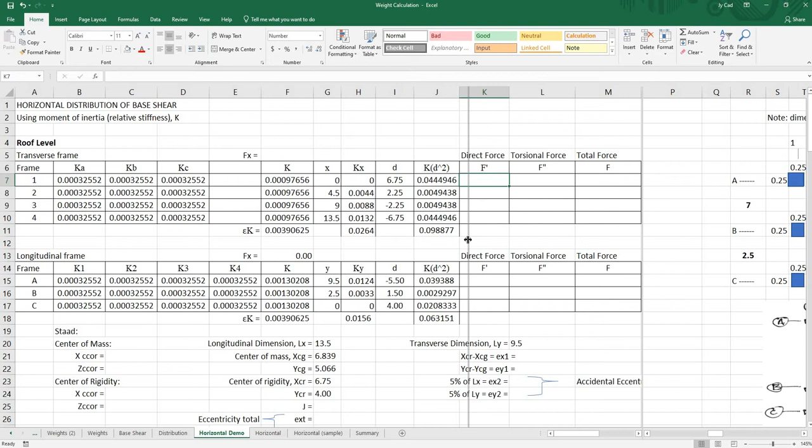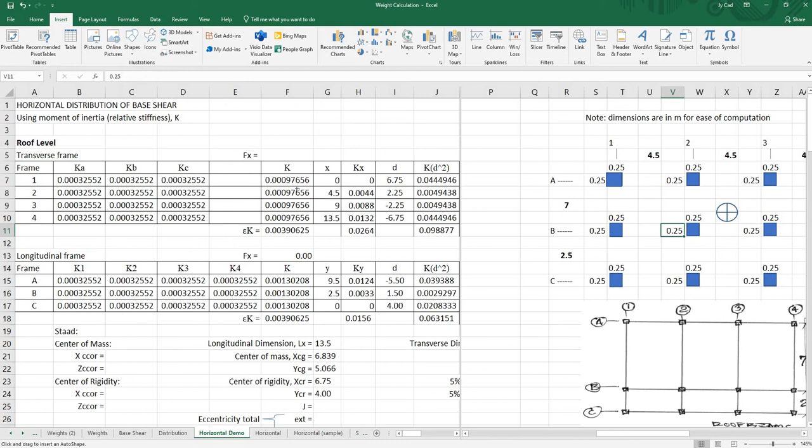Let's say, meron tayong insert, saan si arrow? Ayun. Sa transverse direction, yan, ang magre-resist niyang transverse force would be frames 1, 2, 3, 4.

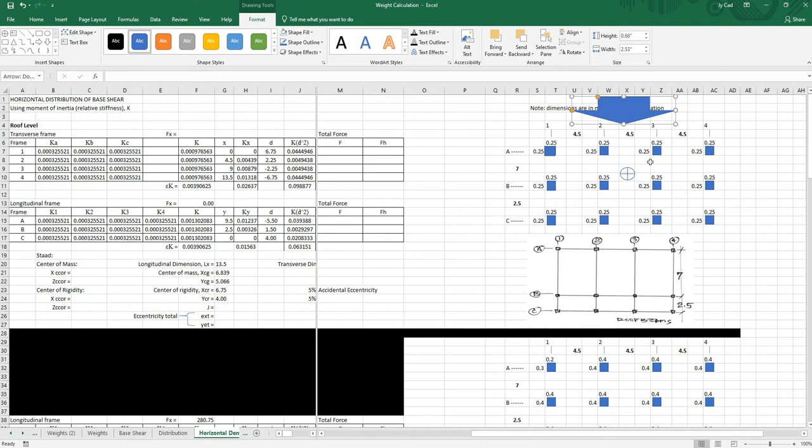Okay? And 100% niyan, nung forces na yan, i-resist nitong 4 frames. Pero it is divided into 4 frames. So, kunin mo lang yan. Ratio niyan would be K divided by summation K.

Then, gawin nating fixed yung F11. So, F4. Then, copy, paste, paste, paste. It so happened na pare-parehas sila ng dimension. Lahat sila pare-parehas din ng sizes. Kaya, equally distributed 1/4, 1/4, 1/4.

Otherwise, kung nagpalit ka dito ng, let's say, 0.3, tapos ito 0.3, then 0.3, and then 0.3. Obviously na yung first grid number 1, malaki ang kanyang sizes, no? Malaki ang kanyang area, mas malaki rin ang forces na tatanggapin niya.

So, 0.409. Then, 234.197 each. Okay, so may effect ang moment of inertia, may effect din ang area. Okay, so yan ang distribution ng direct force. So let's put this back to 0.25 and 0.25.

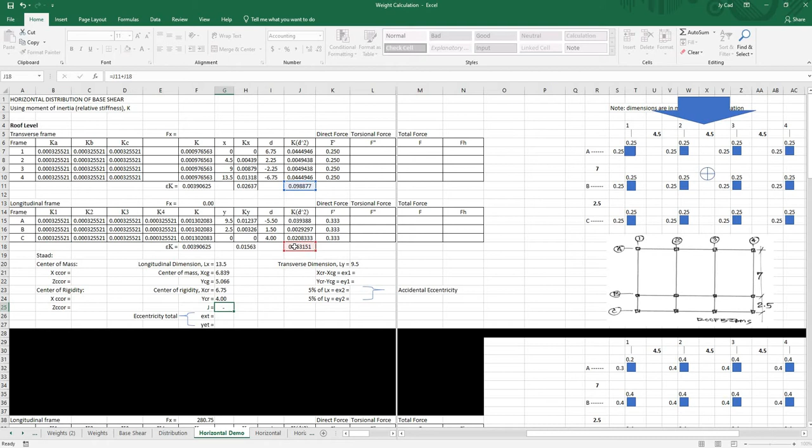Tapos, before doing that, punta tayo dito sa J. J is simply the sum of all the KD squared. So, yan. This plus this. And then next, dito tayo sa XCR minus XCG or the eccentricity.

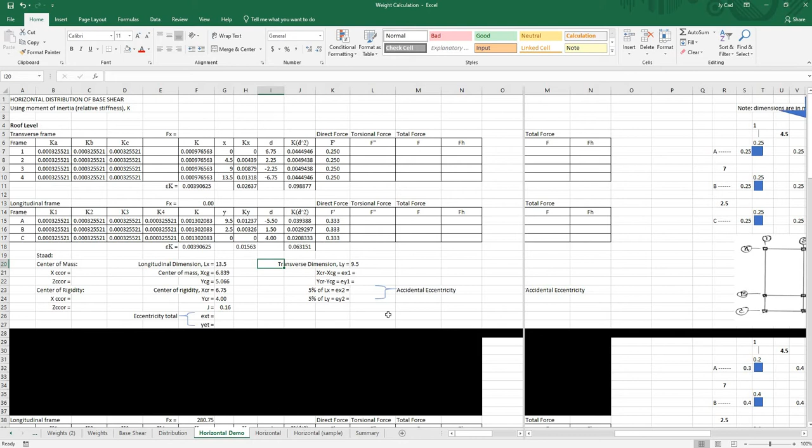XCR minus XCG or the eccentricity 1 and EY1. Assuming na itong green ay itong blue na centroid, yan yung center of mass. Tapos, ito naman yung center of rigidity.

Let's say, palitan ngayon natin itong sizes ng columns dito sa grid 1. Okay, gawin natin siyang 0.5 by 0.5. Okay, 0.5 by 0.5, 0.5 by 0.5. Ibig sabihin, malaki ang forces na tatanggapin nito. And then, yung center of rigidity mo, dapat lumalapit din siya somewhere here.

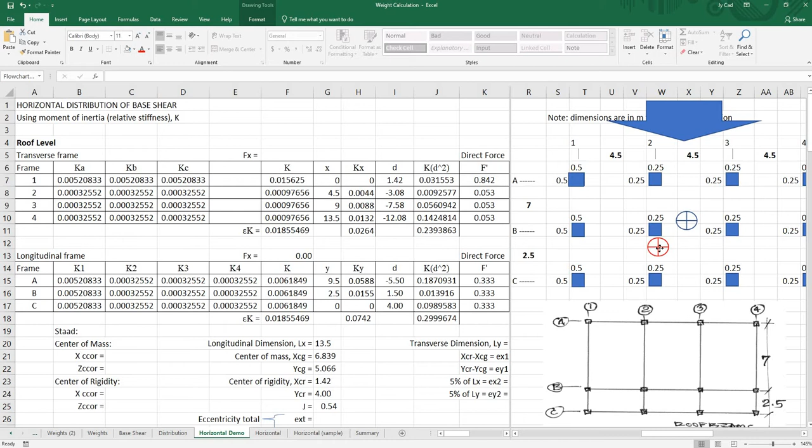Okay? So, tingnan natin ngayon, yung XCR na naging 1.42 na lang. Ibig sabihin, from this origin, nagpapaganito na siya. Okay? So, ngayon, gawin nating yung malaking columns naman dito sa grid 4.

Dapat lalayo siya, no? Okay, so try natin. Ibabalik ko to ng 0.25. Okay, so ito ang gagawin kong 0.5, 0.5. Yan. See? Yung XCR niya naging 12.08. So, tama.

Lumayo siya. Ganon din ang effect pag pinakapalin mong mga columns dito sa bandang taas. Let's say this is 0.5, 0.5. Yan. See? Yung YCR mo tumaas.

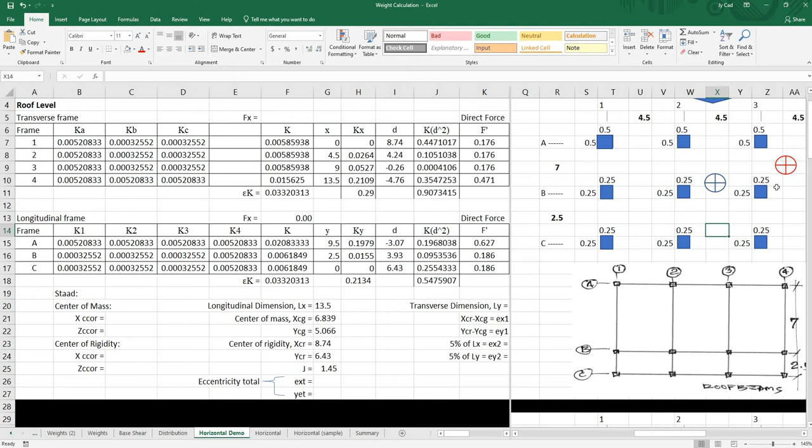So, something ganyan. And then, yung eccentricity, yung difference nitong dalawa. So, that is XCR minus X center of gravity. Okay, meron ding YCR minus Y center of gravity. Yung difference nung dalawa. Okay, so,

This is equal to XCR, ito 8.74 minus XCG, ayan, tapos equal to YCR minus YCG, yan siya. And then 5% of LX, ito yung ating longest dimension. So, ito na ngayon yung accidental eccentricity, no?

Ibig sabihin, kung nagkataon na symmetrical, magkatapat ngayon yung center of mass tsaka center of rigidity. Yung 5%, nagdagdag ka ng distance, ano? Na tigpa 5% nung longitudinal and transverse dimension. Okay, so let's get the 5% of this one.

Lx times 0.05. Tapos ito naman, yung Ly times 0.05. And then, ibalik ko na ito sa aking original dimensions na tigto 0.25.

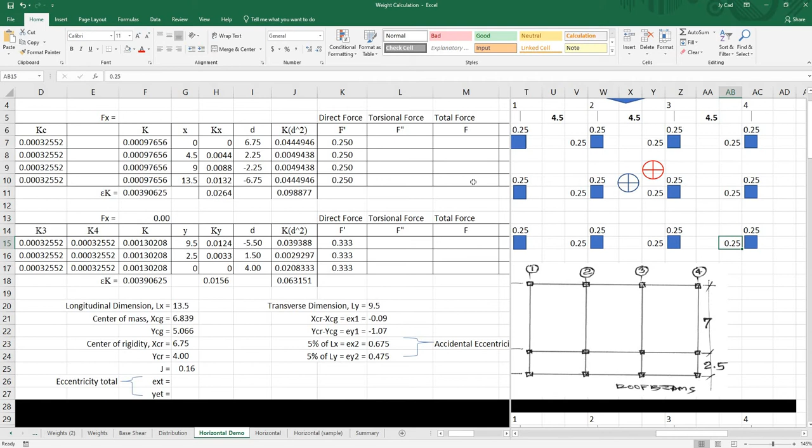Next is, dito na tayo ngayon sa eccentricity total. By the way, 5% of Lx is your Ex2 or second eccentricity. 5% of Ly is your Ey2, no? Second eccentricity. Yung first eccentricity mo, yung difference ng center of rigidity and center of mass.

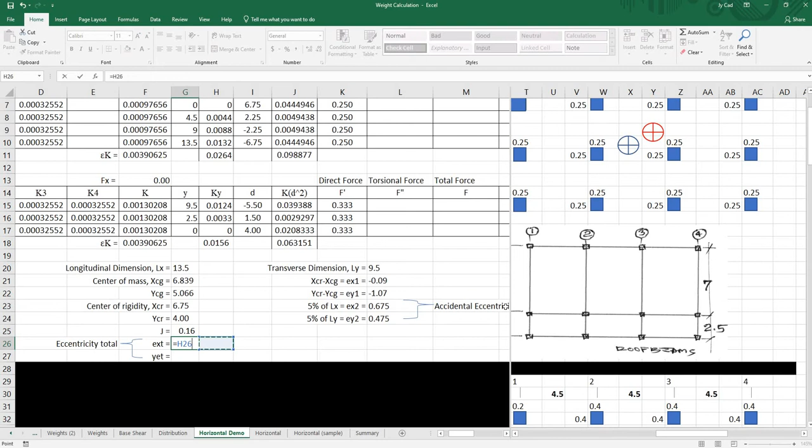Okay. So, i-total natin yan for Ex total. That is Ex1 plus Ex2. And Ye total or Ey total, Ey1 plus Ey2. Okay, baliktad to.

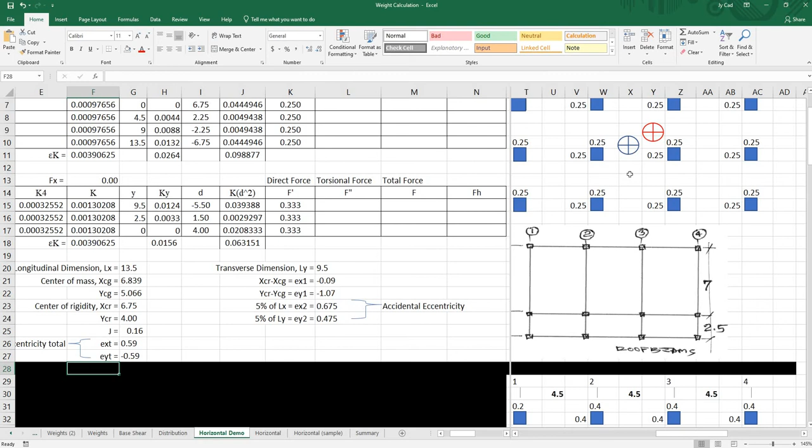Now, since na-consider na-compute na natin yung mga eccentricities, take note na pag yung eccentricity mo, something like that, ibig sabihin, etong lateral force mo, ganyan. Diyan mag-a-act. Tapos, yung direct force dito mag-a-act. Okay? So, direct force dyan.

And then, yung structure mo, mag-displace lang siya ng ganyan. Pero, pag meron kang eccentricity, dito mag-a-act ngayon yung accidental load mo. Okay? Ang tendency niyan, yung structure mo, mag-twist, iikot, yan, parang moment. So, meron kang tinatawag na torsional force, F double prime.

Okay? So, yan ang kukomputin natin next. So, torsional force is equal to K times total eccentricity along X times distance D divided by J. Okay? Wherein J is the sum of KD squared. Okay? So, let's do that formula.

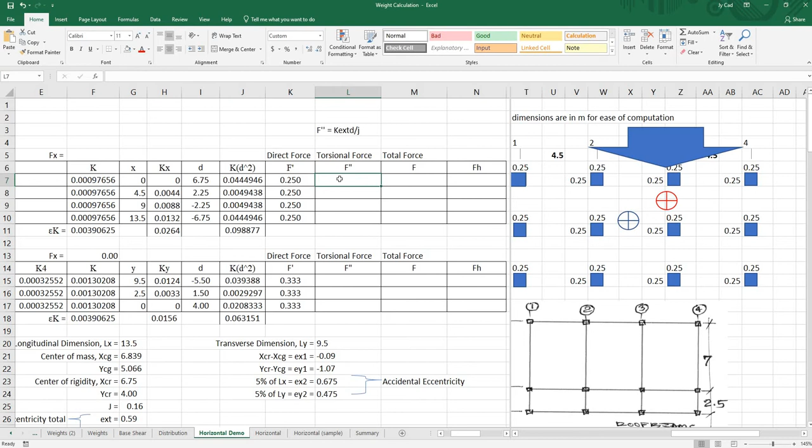Oops. So, F double prime is K, ito siya, times EXT, ito, times D, divided by J. Yan.

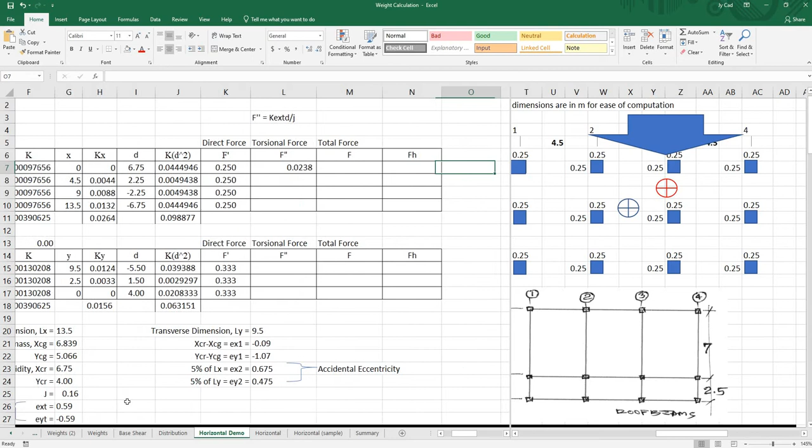Pero, if i-fix natin ngayon si EXT, tsaka si J. Okay? So, to do that, I'll press F2. Punta ako dito sa kay EXT and then F4. Tapos si J, i-fix ko rin siya. F4 yan. Now, I can copy this.

And then, take note na yung total force naman, okay, so palitan natin to ng red. Fill.

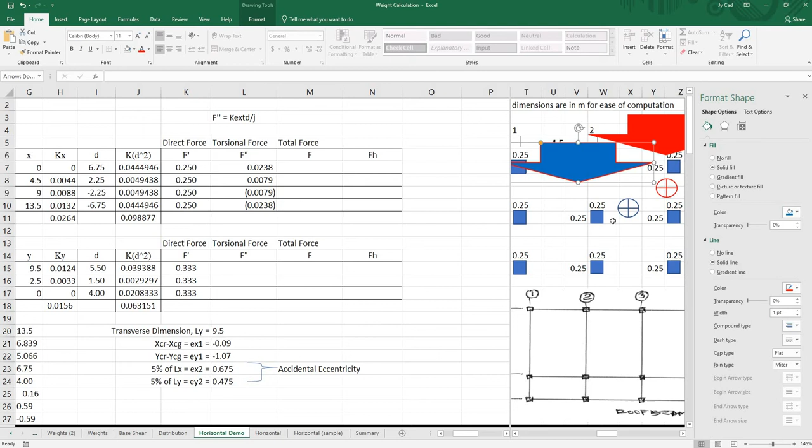Yan. Meron ding blue. So, let's say that the blue, that is the direct force. Ano? Yung red, yan yung torsional force.

Okay? Hindi yan magiging times 2. Dapat, yung total nitong dalawa, that would be equal to your 109.07. Hindi yan magiging 109 tsaka another 109. Mali yun. Kaya nga, ang total force mo would be F prime plus F double prime. As I check, dapat ang sum nito, yung direct force, would be 1.

Ganon din dito sa torsional force, dapat 0 naman yan. Take note na ang torsional force mo, may twisting yan, ano? Meron dyan, meron din dito sa kabila. Pero, opposite in direction, kaya negative ito. So, something like that. Kaya ang sum nito ay 0.

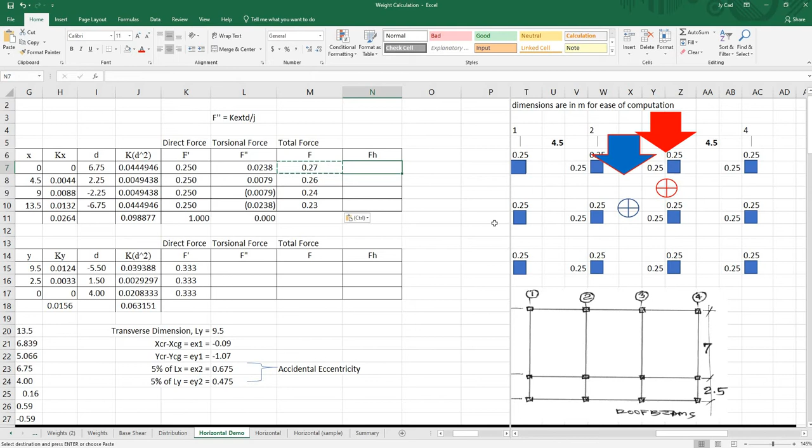And then, pag-addin mo ngayon yung dalawang yan. Tapos, ang f sub h mo ngayon, before doing that, puntahan muna natin dito sa longitudinal frame. So, the same equation, f double prime is equal to k, this time, EY total naman ang gagamitin natin.

So, K, ito, times EY times D divided by J. Yan. Then, i-fix natin si EY total tsaka si J. And then, copy na natin siya. Then, let's check the total again.

This should be 1, and then this should be 0. So, pag 1 tsaka 0 yan, ibig sabihin, okay na. Pwede na nating pag-add si f is equal to f prime tsaka f double prime.

Next is papasok na tayo ngayon, ipapasok na natin ngayon si horizontal force. Itong si 109.07. I-distribute na natin ito ngayon dun sa frames. So, click ko dyan. This is equal to 109.07. Yan si f sub x.

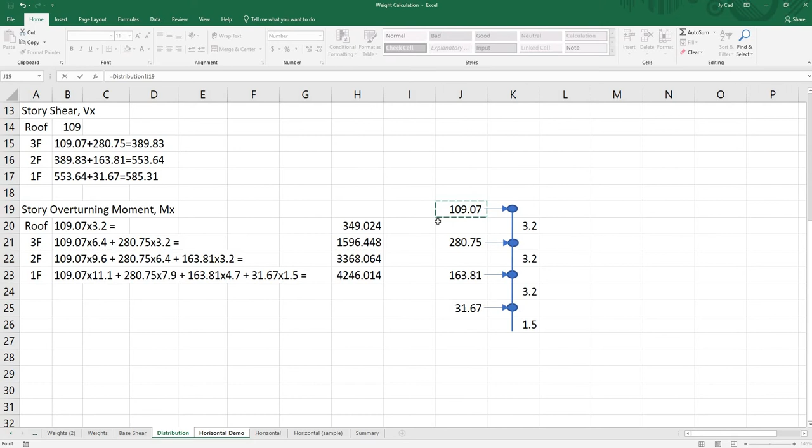Tapos, itong f sub h, that is simply 0.27 times 109.07. Ito naman, 0.26 times 109.07. Ngayon, para mapadali, ililink ko na lang yan. Equal to, then dito sa distribution, wag dyan, dito na lang. Okay, para mas exact, mas malapit sa katotohanan.

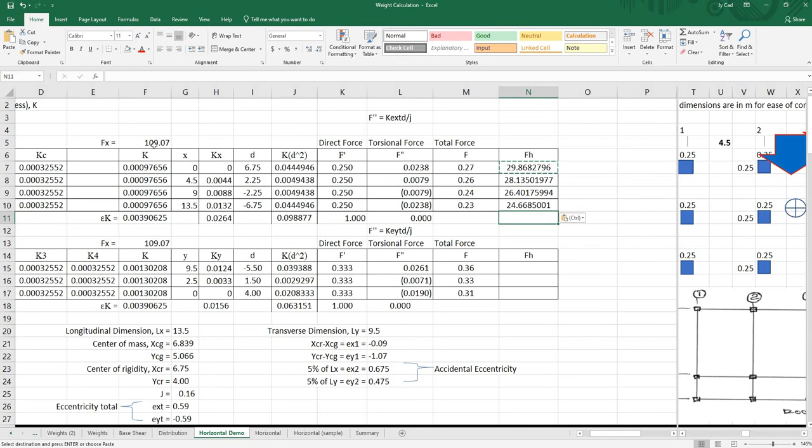Tapos, ito naman, equal to, equal sign, then f times fx. Tapos, yan, gagawin kong fixed. Click ko sa F4. Then, copy, paste, paste, paste. As a check, ibig sabihin nito, yung 109.07, this is for the transverse frame.

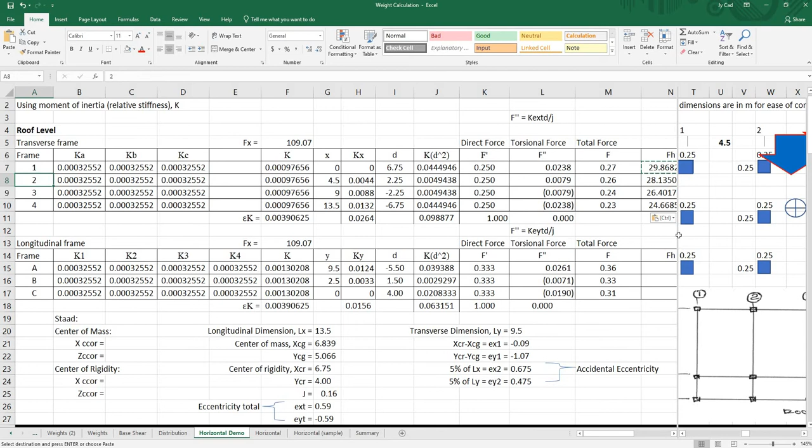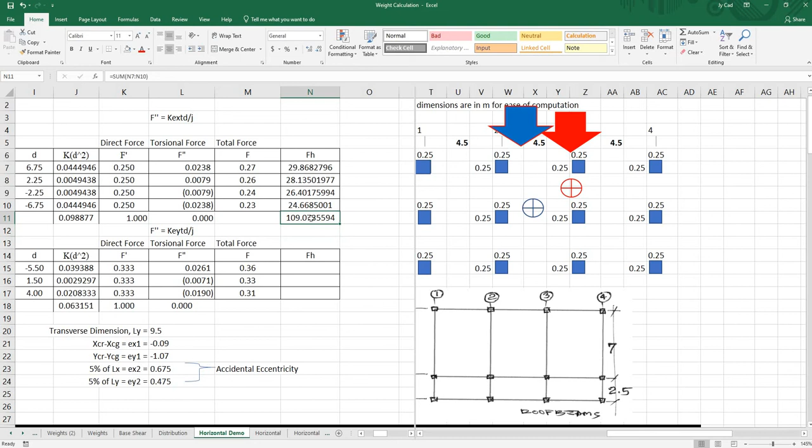So, yung direct force na blue plus torsional force na red, that is equal to your 109.07. Kaya let's check. So, dapat sum, click mo yan. Yan, see? 109.07. Next, dito tayo ngayon sa longitudinal frame, or the seismic is acting longitudinally.

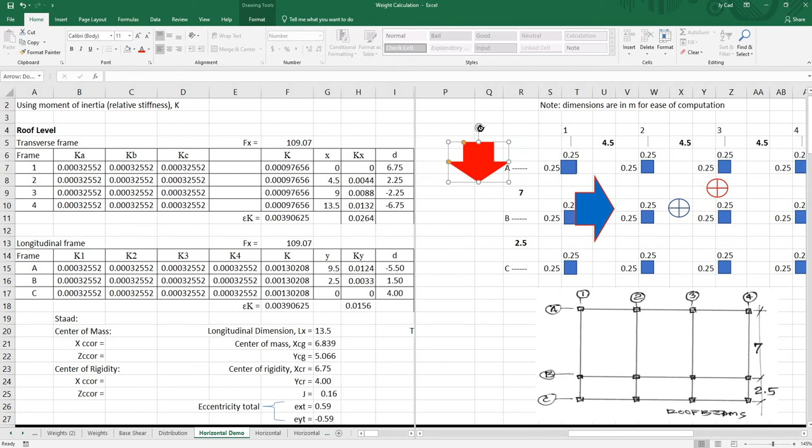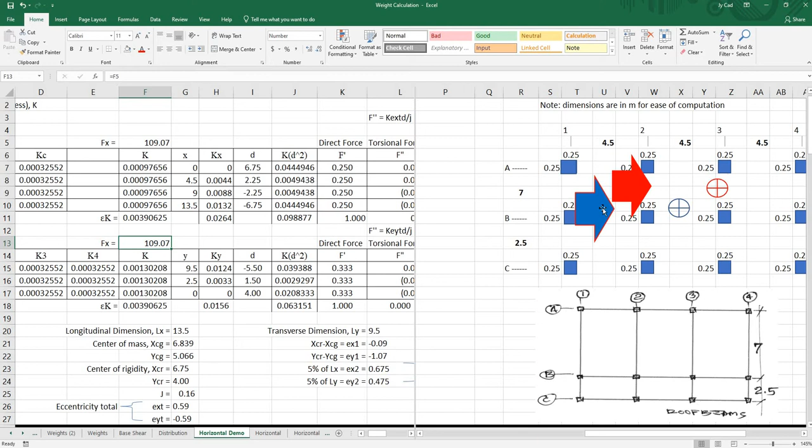So, something like this naman. Yan. So, direct force. Tapos, ayan. Torsional force. So, ganun din. Meron ka rin ditong 109. This direct force plus torsional force is also 109.07. Yan. So, simply ganyan lang siya.

Click mo lang dyan. And then, same thing, this is equal to the percentage of the total force multiplied by Fx. Tapos, i-fix ko lang yan. F4. Paste mo dyan. And then, as a check, dapat, ang sum nito would be equal to your Fx.

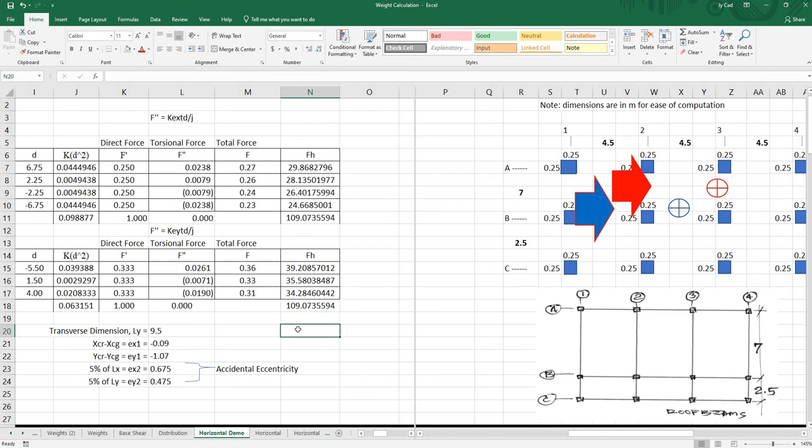Likewise, this should be equal to this longitudinal force should also be the same with the transverse force. Yan. So, true. Okay, next is dito na tayo ngayon sa center of mass.

This is simply the same as XCG 6.839, center of rigidity XCR. Okay, ito naman kay STAAD, Z kay STAAD eh. Ayan o, STAAD nakalagay doon. This is equal to yung Z coordinate naman 9.5, ano? So that is 9.5

minus 5.066. Ibig sabihin yan, si STAAD kasi nasa baba yung figure. Okay? In short, yung origin from dito, nilipat lang natin sa taas. Kaya 9.5 minus ito.

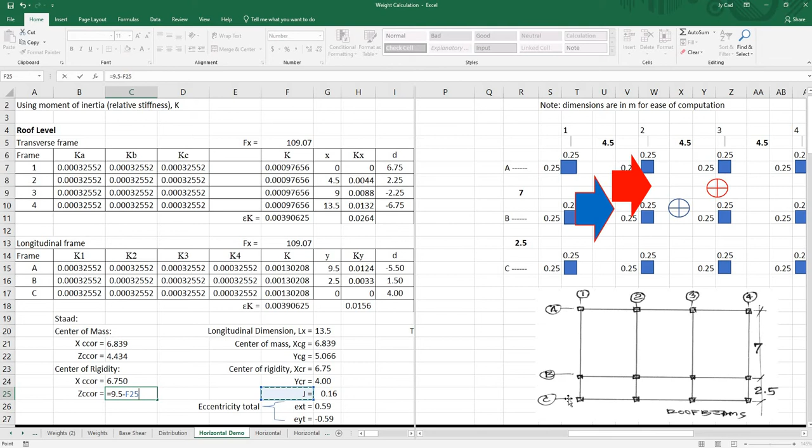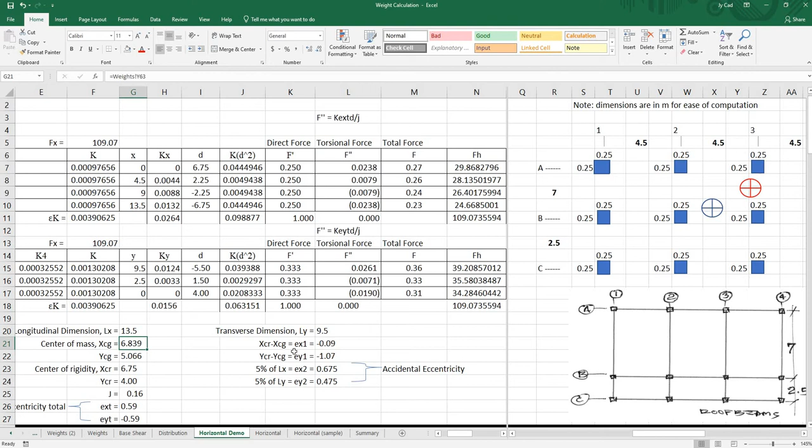And then Z coordinate, ganun din, 9.5 minus the YCR. Oops, something's wrong. Check ko lang itong mass center of mass.

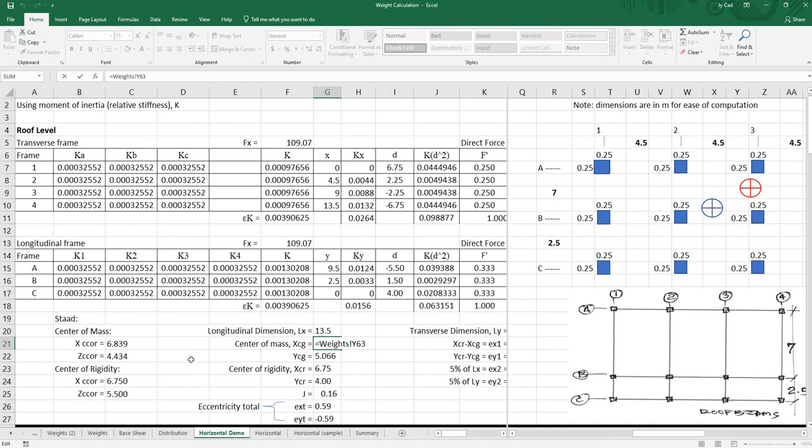Dito yata ako nagkamali. This is weights Y63. Dapat nasa roof level ito. Okay, roof level. Weights Y63. Nasaan si 63? Ito. And 6.8391. Ayan, 6.8391. Pareho. Pero, anong level siya?

Ayun, third floor level. Dapat, dito tayo sa roof level. Ayan. So, dapat Y23. Yun. So, this should be equal to weights and then at roof level, ito.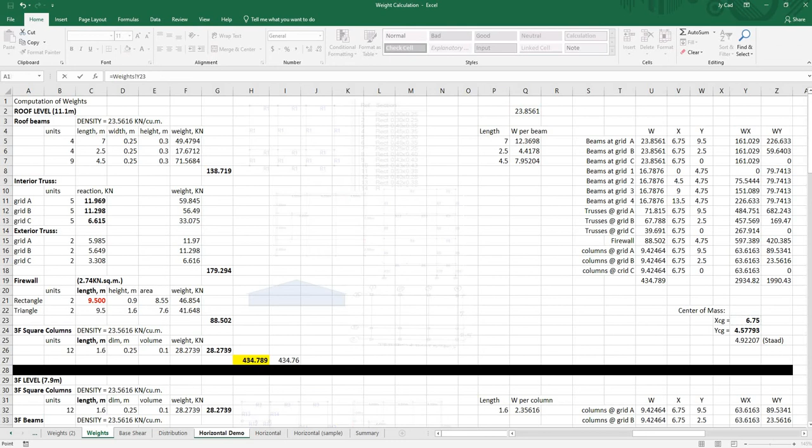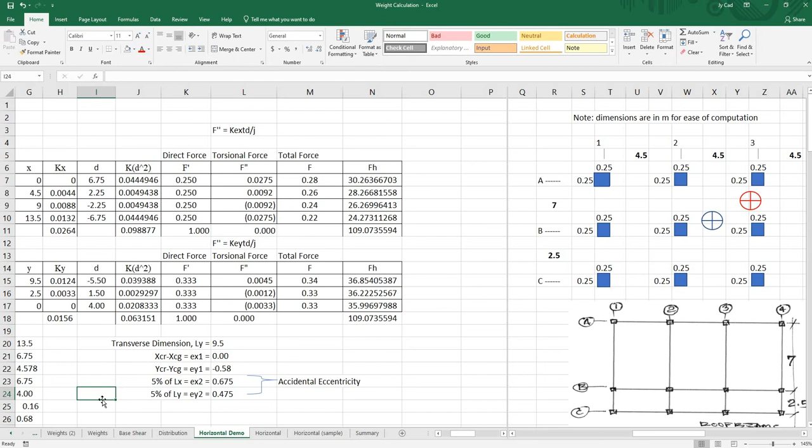Yan. Tapos, ito naman, copy ko lang yan. Y23, Y24. Yan. So, okay na ang aking distribution ng direct force tsaka torsional force.

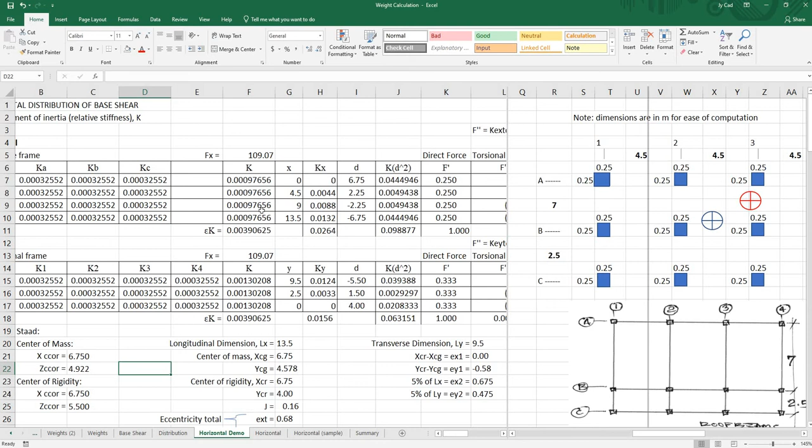Okay guys, so ito ay para dito sa roof level. Ngayon, same procedure din sa third floor level. Okay, so pakita ko lang kung ano yung ginawa ko sa third floor level.

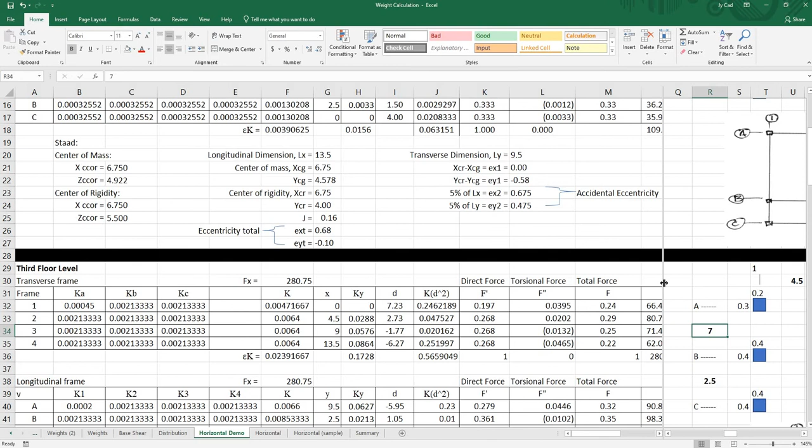This time, same procedure. So first, dito sa dimensions, ang kukunin mong dimensions ngayon naman would be dimensions ng column mo. Take note na dito tayo. Okay? Ang column na magbubuhat itong second floor column. Wala nang kinalaman yung third floor column, ano?

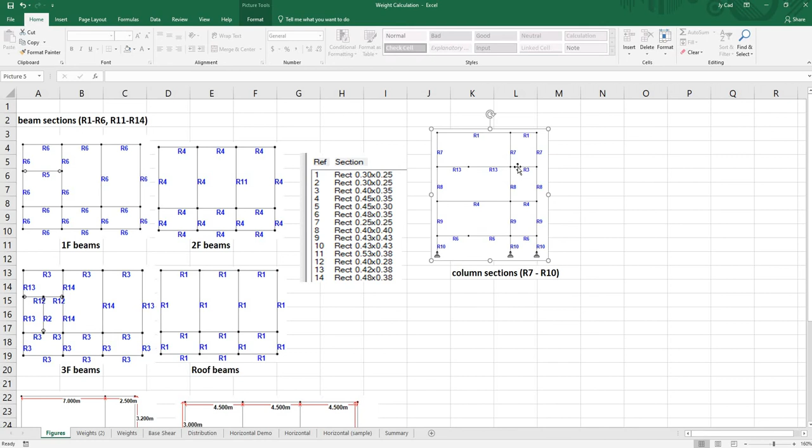So, ang rigidity mo ngayon dyan, yung R8. And R8 is 40 by 40. So, happen lahat 40 by 40. Tapos, ang weight mo naman ngayon would be on this level. In short, ang F sub X na kukunin mo would be yung 280.75.

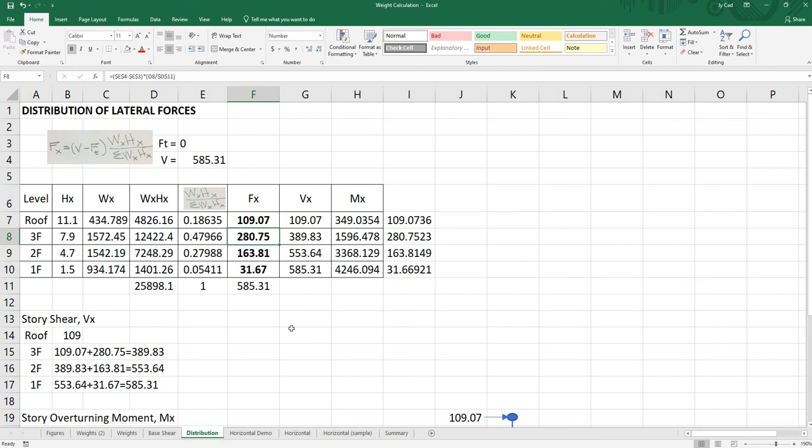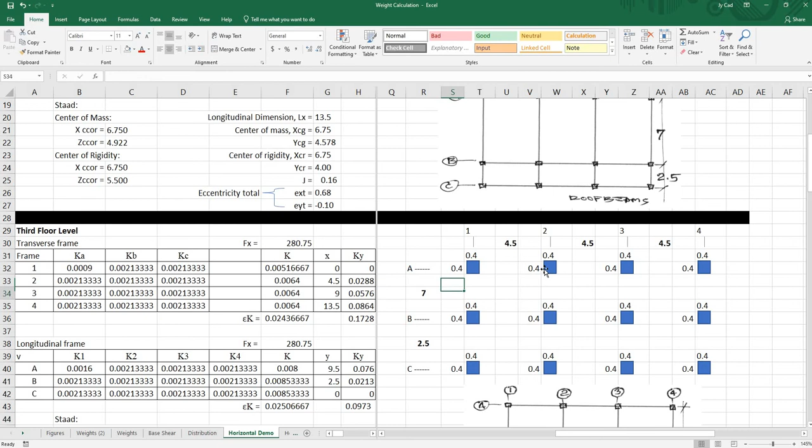Okay, so let's go back here. So 0.4, lahat yan, 0.4. So kung ano yung ginawa ko dito sa roof level, ganon din ang ginawa ko dito sa third floor level. Okay, so ang pinagkaiba lang yung column dimensions.

Okay, tapos yung F sub X, 280 na siya. And then the same procedure. Tapos kunin mo rin yung center of mass, 6.839. This is at the third floor.

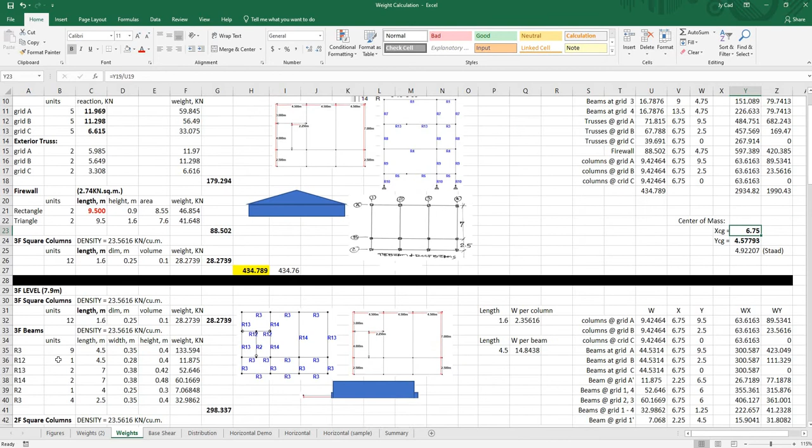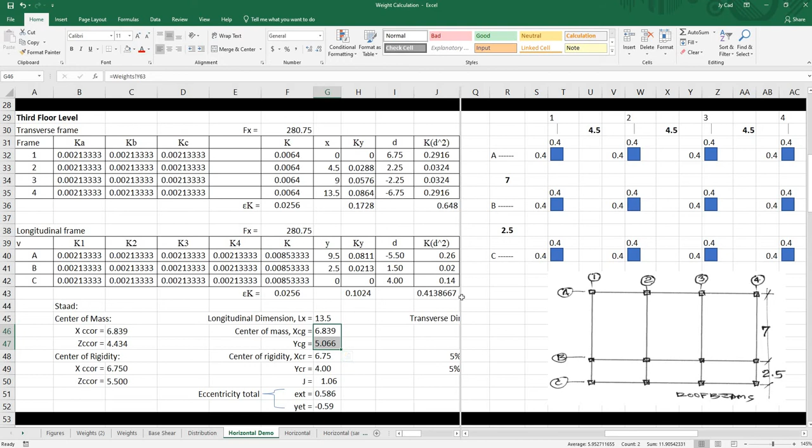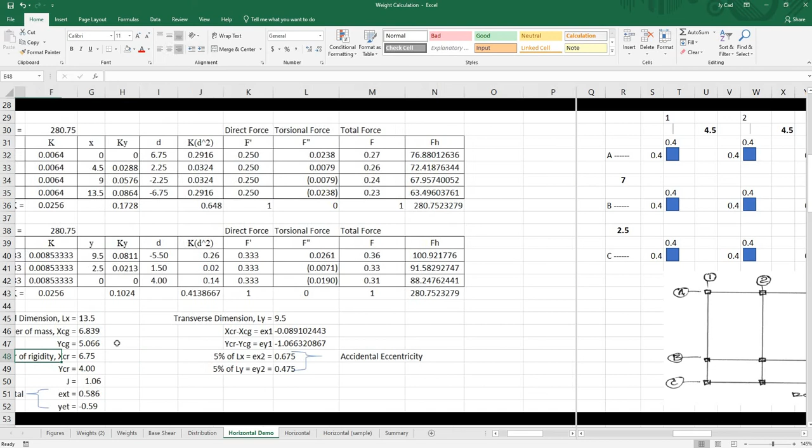Okay, at third level, 6.839 tsaka 5.066. And then, if you will check again, dapat ang total nito is 280. Okay, so same thing with second floor hanggang sa first floor. Okay guys, so yan ang horizontal distribution ng base shear sa frames.

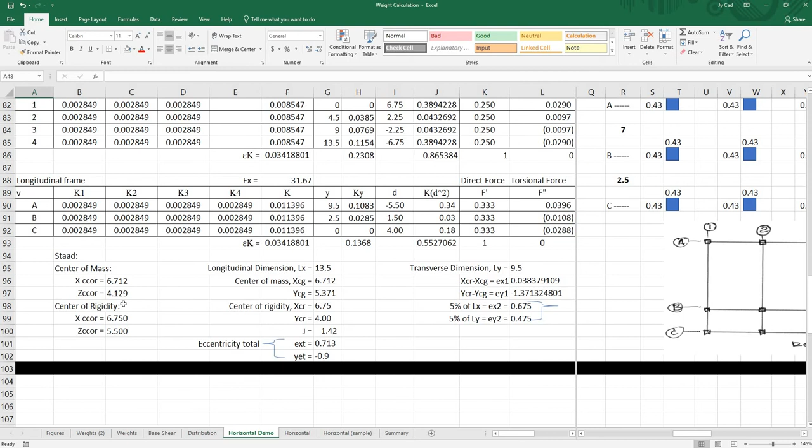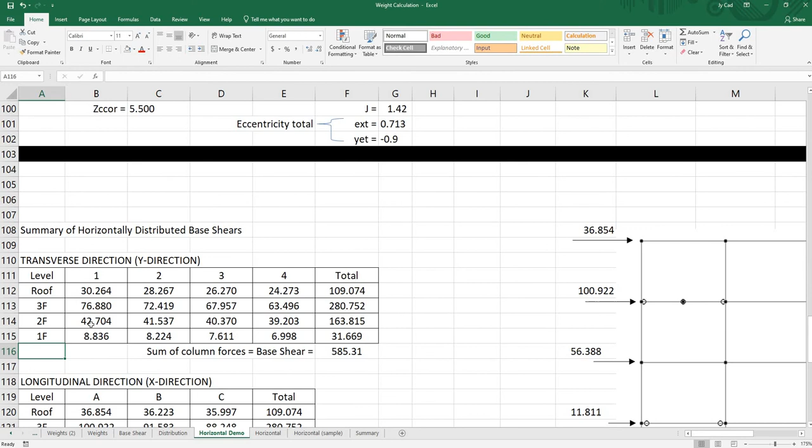Next, isa-summarize natin ngayon. Dito tayo, sa transverse direction muna. Summary of horizontally distributed base shears.

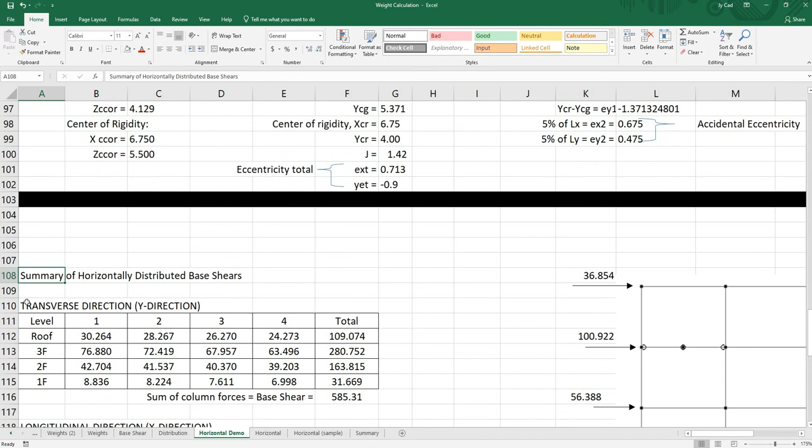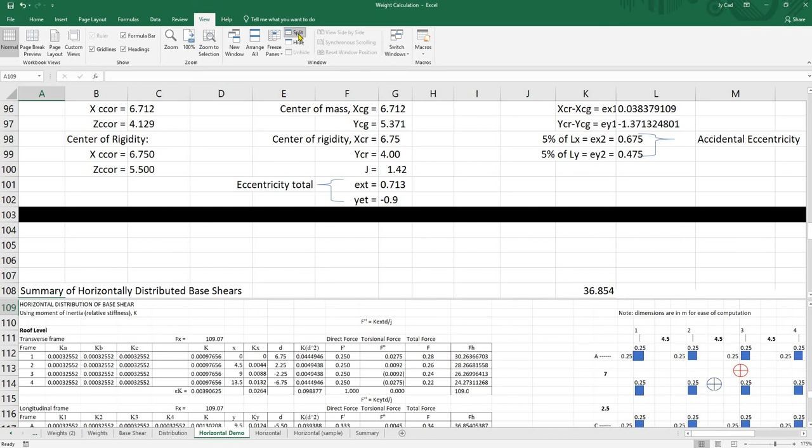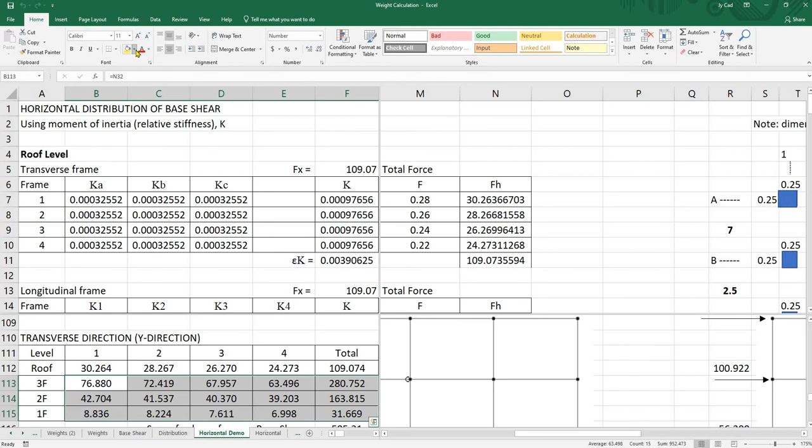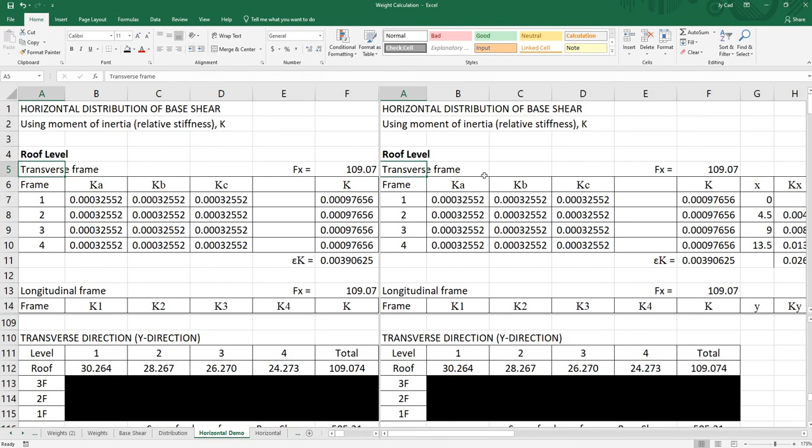So balik tayo dito sa roof level. Split ko lang, view, split. So i-block ko lang muna ito. So at roof level, dito tayo sa roof level, transverse direction. So ito ang kukunin natin. Roof level, transverse direction or transverse frame. Kukunin natin si yan.

Yan ang kailangan natin. So sa frame number 1, 30.264, ito. Sa frame number 2, you have 28.267. And frame number 3, you have 26.269. Finally, frame number 4, you have 24.273. And then, if you will add them, dapat 109.07.

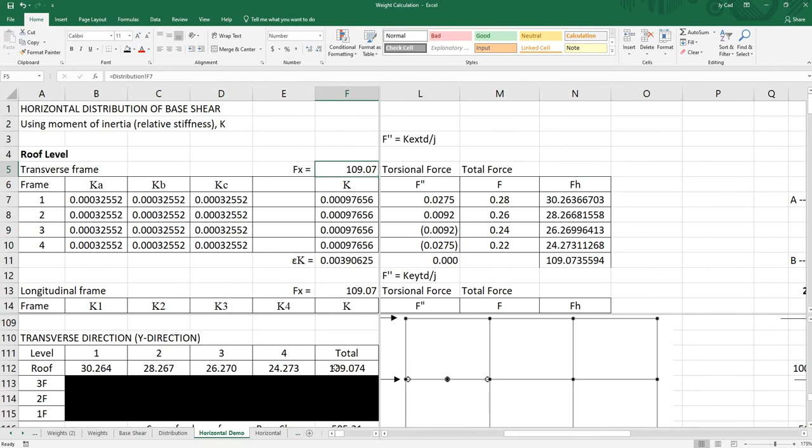Okay, next, punta tayo ngayon sa third floor level. Sa frame number 1, okay, third floor na tayo. Frame number 1, that is 76.88, ito. Then 72, 67, then 63. So you do the same thing with the second floor and then the first floor.

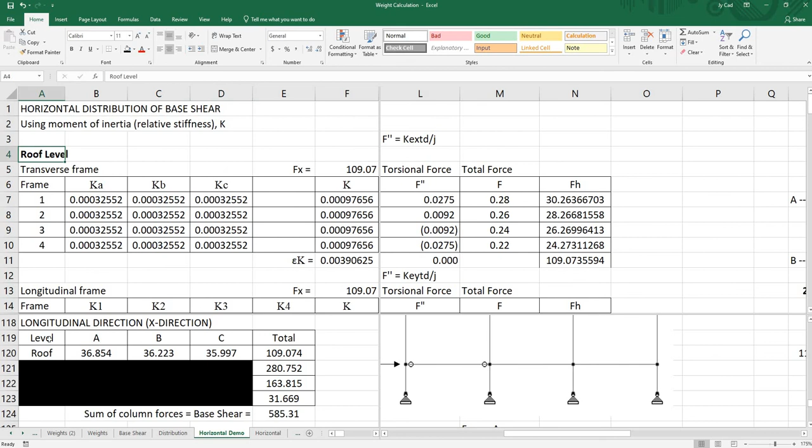Dito naman tayo ngayon sa longitudinal direction. Okay, sa roof level muna. Ito, so this is a roof level, okay? Tapos sa longitudinal frame, kukunin natin yan. So for frame A, you have 36, tapos 36.22 for frame B, then 35.99 for frame C.

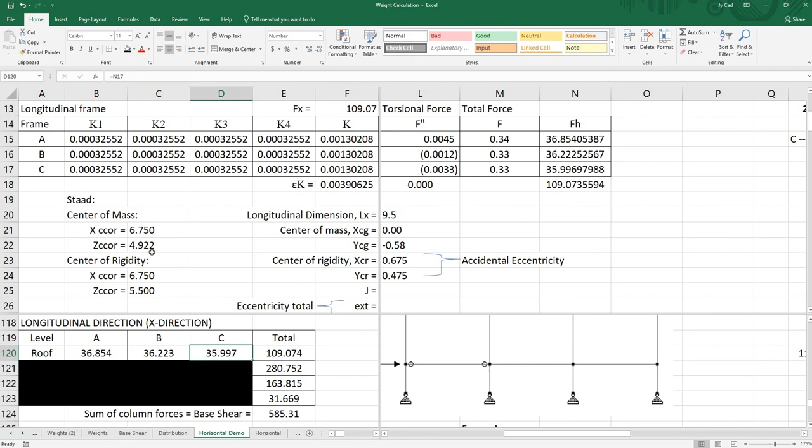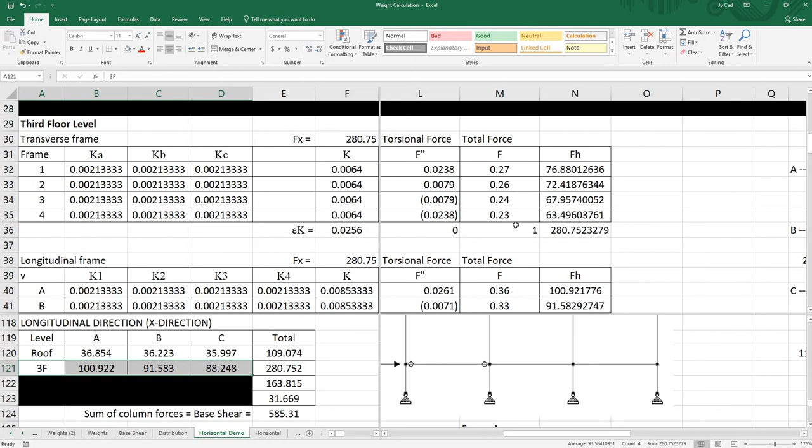Same thing with third floor level. You have 100, 91 and 88. You do the same thing with second floor and first floor level.

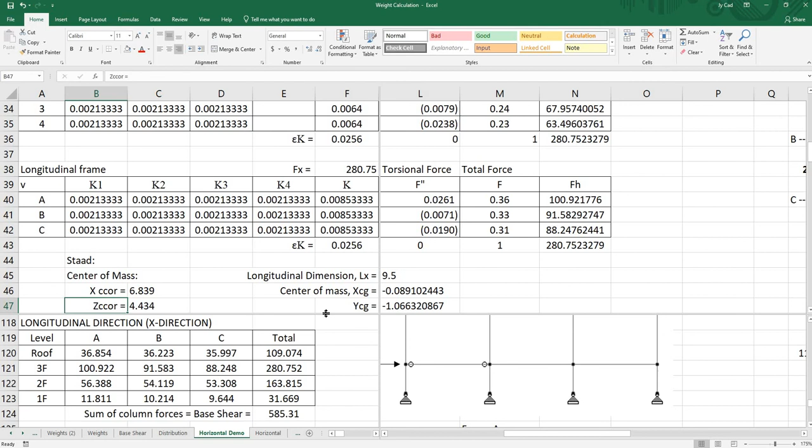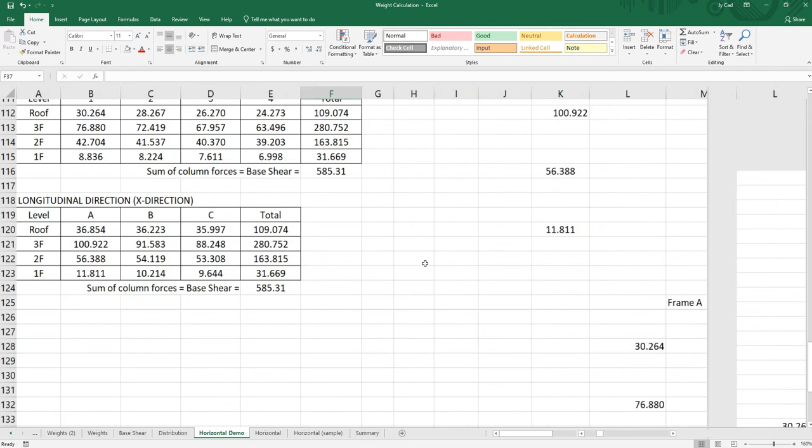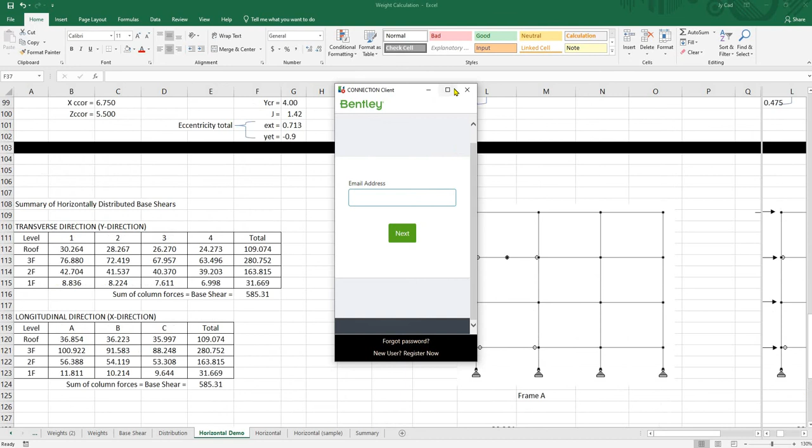So remember na ang ating frames, you have transverse frame, frame 1, frame 2, frame 3, frame 4, and then longitudinal frames, grid A, grid B, grid C. So dito tayo sa frame 1. Or, let's say, kunin natin yung frame A. Ito, yan, so ito siya, no? Ang kukunin nating forces ngayon would be frame A longitudinal. Yan, so ang force mo dito is obviously.

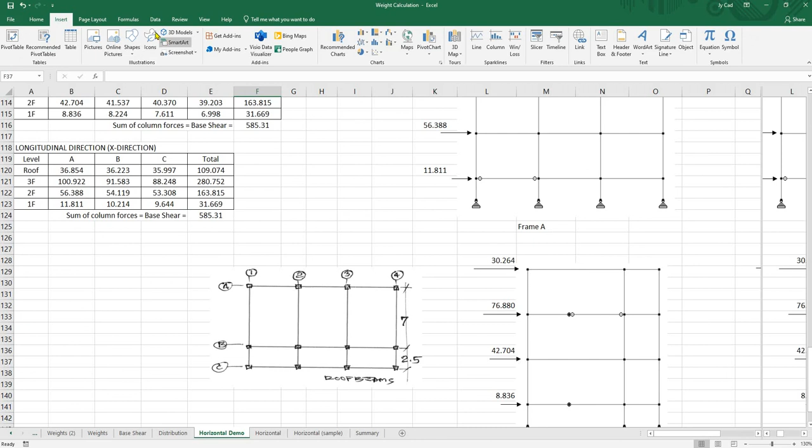Pag ganito, yan. So longitudinal direction tayo sa frame A, which is ito ang kukunin natin. Okay, so ito, ayun gagawin natin. So 36.854, ayan, and then this is at roof level, ano? Then at third floor, you have 100.922, at second floor 56, and then first floor 11.811.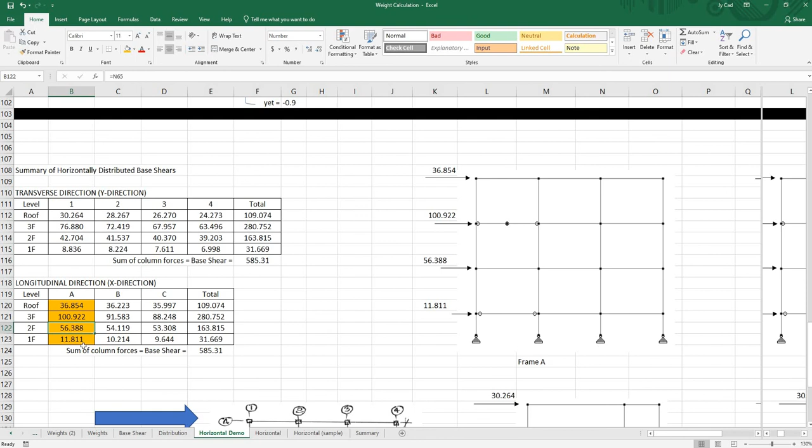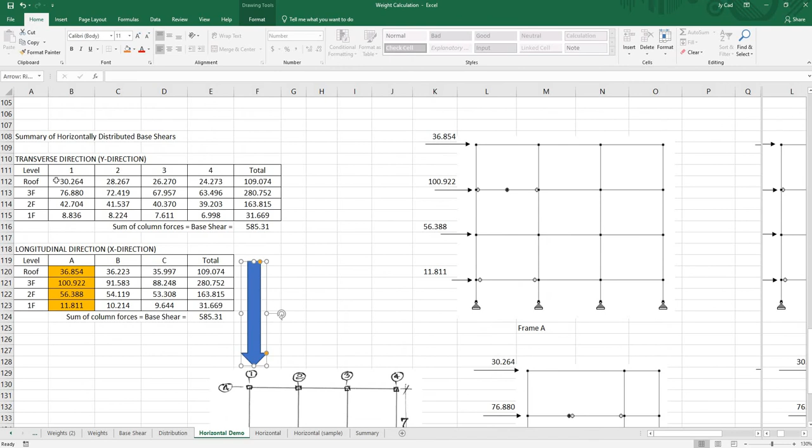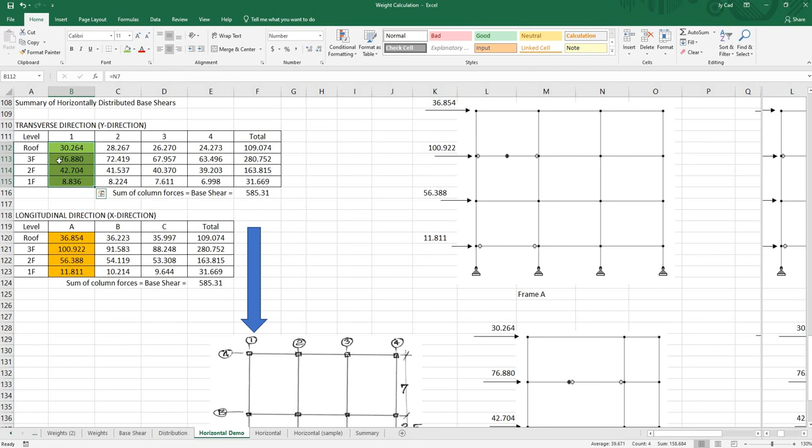Okay, next is at frame 1. This time, ang seismic force natin, something like this. So ito yung 7 meters. Ayan yung 7 meters, okay? So ang highlightan naman natin ngayon would be at frame 1. Ito, yan, color this as green. So we have 30.264 at roof level. And then 76.88 at third floor. Ayan, so forth and so on.

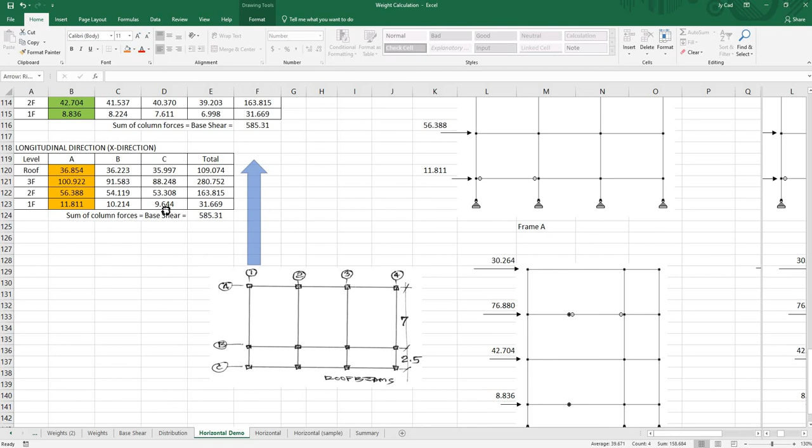And remember na ang earthquake, hindi lang positive direction, dapat may negative direction din siya, ganyan. So itong 30.264 at saka 76, dito naman yan papalo sa kabila, ganun. Okay, so aside from that, in reality, aside from this direction transverse, meron ka pa ring orthogonal effects na tinatawag, which is 30% naman nung other direction. So, ibig sabihin, yung earthquake mo may orthogonal effects, 30% nung other direction. So how many combinations lahat?

So may ganyan. Tapos ganito yung orthogonal mo. And then consider mo rin yung orthogonal na ganyan. Diba? So you have 2 combinations na. Times 4, so magiging 8 combinations lahat.

Okay guys, and then ang next topic natin naman para sa earthquake, nakagawa na tayo ngayon ng lateral forces, meron na tayong frame. Dito na papasok yung approximate methods, yung portal method, factor method, cantilever method. So yung mga approximate methods na yun, kukunin mo yung mga responses ng columns and beams, yung mga moments, tapos yung shears acting on these beams. Okay? Ang limitation nga lang ni approximate methods is simply hindi siya exact. Hindi yan ang tinatanggap dito sa building permit.